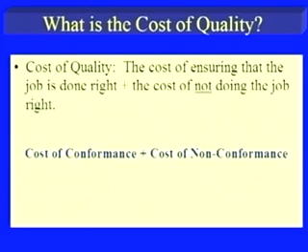If we summarize the above definition, the first part of cost of quality is the cost of conformance, and the second part is the cost of non-conformance. The components are like this: cost of conformance includes prevention and appraisal cost. Cost of non-conformance includes internal as well as external defect cost.

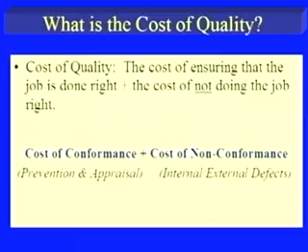The definitions of all four components of the cost of quality are here. The first is the prevention cost, the cost of planning and executing a project so it is error free or within an acceptable error range. The second component is appraisal cost, that is the cost of evaluating processes and their output to ensure quality.

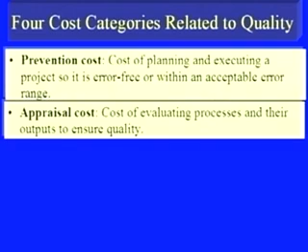The third portion of the cost of quality is internal failure cost, cost incurred to correct an identified defect before the customer receives the product. The important factor in this definition is that we need to be very careful in deciding the cost related to internal failure, the cost incurred to correct an identified defect.

Identified defect means that we are doing some inspection and finding the defect. Not only should we find the defect, but we need to correct it, and these internal costs are the costs counted before the customer receives the product.

The external failure cost is the cost when the product has been shipped to the customer. When the customer starts using it and finds some problem in the product, whatever cost is spent comes in the category of external failure cost. That is the cost relating to all errors not detected and corrected before delivery to the customer.

This cost has a multiple effect: not only is the product coming back to the organization for rework, but it is spoiling the image or the goodwill of the company. So the internal and external failure costs need to be carefully ascertained apart from the prevention and appraisal costs.

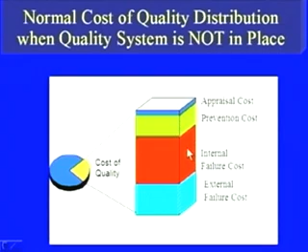Once internal and external failure costs have been reduced, this addresses the three issues I mentioned at the beginning of the lecture: productivity, cost and quality. Once your scrap, rework, etc. is reduced, certainly your productivity is improved, and these costs are reducing because of the better quality.

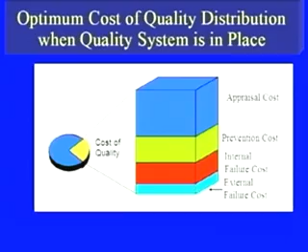So, once better quality is there and productivity is there, certainly the profit the company will earn is much higher than the company which does not have the quality system in place. With the background of understanding of cost, quality and productivity, let us talk about the evolution of quality.

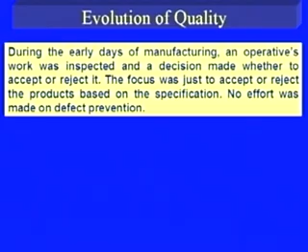During the early days of manufacturing, an operative's work was inspected and a decision made whether to accept or reject it. The focus was just to accept or reject the products based on the specification. No effort was made on defect prevention. That means the total output was based upon inspection.

Inspection basically is an audit tool. It is not building quality into the product, it is just auditing good or bad. So, when the product was produced, the inspector used to inspect it and say it is good or bad. Bad products were sent back to manufacturing for rework or scrap, and the good product was delivered to the customer.

And there was no effort in finding the causes that were creating the bad products. That is why it is mentioned that there was no effort on defect prevention. In 1922, statistical theories began to be applied effectively to quality control, and Shewhart in 1924 made the first attempt at modern control charts. However, there was little use of these techniques in manufacturing companies until the late 1940s.

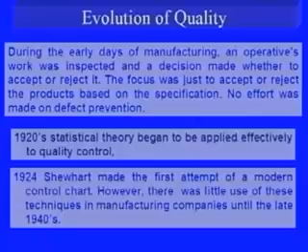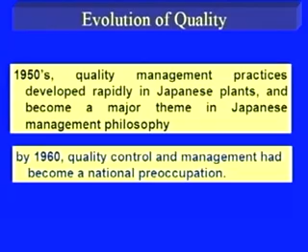In the 1950s, quality management practices developed rapidly in Japanese plants and became a major theme in Japanese management philosophy. By 1960, quality control and management had become a national preoccupation. In 1969, Feigenbaum used the term total quality for the first time, and in 1970, Ishikawa used the term company-wide quality control.

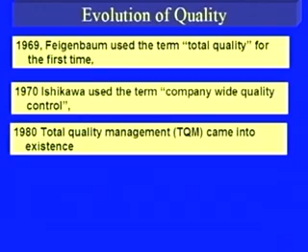In 1980, total quality management came into existence, and as we move into the 21st century, TQM has developed in many countries into a holistic framework aimed at helping organizations achieve excellent performance, particularly in customer and business results.

If we see this evolution of quality in historical perspective, this table has been divided into 4 parts. First, as I mentioned, in the early days of manufacturing the focus was on inspection. No effort was put in to maintain the quality of the product regarding the prevention of defects. The second row is statistical quality control, third is quality assurance, and fourth is strategic quality management. Each is seen with a different primary concern, view of quality, emphasis, and methods used.

If we see inspection, during the early stage of manufacturing, the primary concern was detection of scrap, defective products or defects, although there was no effort on prevention, as I mentioned earlier. The view of quality during that period was a problem to be solved, and the emphasis was product uniformity, that every product going into the hands of the customer should be uniform in all aspects, meaning it should be perfect.

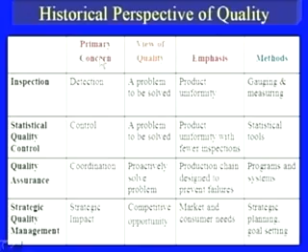Dimensions of quality. Whatever we are saying about the dimensions of quality, let us see what we think of quality. There are various ways we can think of quality. Garvin has given 8 dimensions of quality, since different people see quality in different ways. Garvin has mentioned performance as one of the quality characteristics that a person can see; depending upon the customer, he may be thinking about aesthetics, different points are there. Some people think about the specification, some people only focus on whether the product performs well.

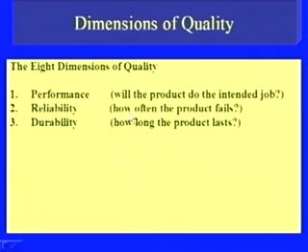So, the first dimension that Garvin has given is performance, and the question we can ask is: will the product that we are getting, or manufacturing, do the intended or required job? The second dimension is reliability. Not only do we talk about the performance of the product, but also its reliability, how often the product fails. Sometimes, in conjunction with performance and reliability, we consider durability, how long the product lasts, meaning the life of the product. Serviceability: how easy is it to repair the product in case there are small failures. Aesthetics: what does the product look like?

Features: what does the product do? Sometimes it's not only the performance, reliability, durability; there are different similar products available in the market. Some products have few features, some products have some additional features. Whatever additional we are getting, that basically appeals to us.

Conformance to the standards: whether the product meets the specification. Sometimes the customer provides that the product should have that much tolerance or that much specification, this much strength, etc. So, whether the product that the customer ordered or thought of initially meets the specification as he has specified.

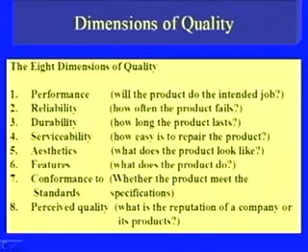And the 8th dimension is the perceived quality. Perceived quality means what is the reputation of a company or its product, that is a goodwill. Sometimes we have in our mind that whatever product we are buying has good quality, or the company's image basically goes with the product.

So, these are the 8 dimensions, and it depends upon the customer, upon the person, whether he is looking for 1 dimension, 2 dimensions or all the 8 dimensions of the product, that he is equally satisfied with the performance, reliability, durability, serviceability, etc.

Maybe sometimes some person goes for only 1 or 2 dimensions, performance and perceived quality. He is only looking that the company should have good quality as well as the product should perform well. So, the person may not bother about how long the product lasts. So, depending upon the requirement, a person can have different dimensions of quality.

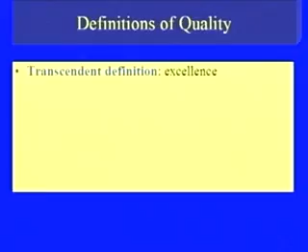And coming to the definition of quality, we can define quality in 5 different ways. The first way is the transcendent definition: excellence in all the aspects. The 8 dimensions I mentioned, when we go for the transcendent definition, we say excellence.

The second definition may be the product based definition: quantities of the product attributes. The product may have 1, 2, 3 attributes, depending upon the customer requirement. The third type of definition is the user based definition: fitness for use, fitness for the requirement, whether the product is fit for my intended use.

Fourth is the value based definition. Sometimes when we go for a product, not only do we check the quality, but also the prices, and we try to make the trade off between quality and price. Sometimes we have good features, good quality, good performance, but costs are high. If the price is the prime concern, we have to think of another product. So, some people go for the value based definition.

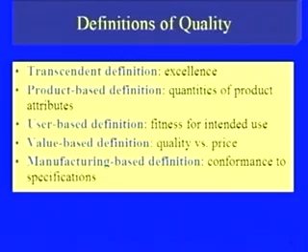And the fifth is the manufacturing based definition that people used earlier: conformance to the specification, whether the product being manufactured meets the specification provided by the designer. So, these are the 5 different ways we can define quality, because there is no unique definition. As I mentioned earlier, it is the individual perspective how he looks at quality.

This is a traditional definition: quality means fitness for use. This is given by Joseph Juran. Customer driven quality, as per the American Society for Quality Control, ASQC: the totality of features and characteristics of a product or service that bear on its ability to satisfy stated or implied needs of the customer.

This means meeting or exceeding customer expectation. Different companies just focus on meeting the customer expectation, and the customer is satisfied. But when you give some additional feature, something extra that the customer was not expecting, that means wow quality. So, there is a difference between meeting and exceeding customer expectation.

So, when the customer buys a product and is satisfied with it, he is a satisfied customer. But once you give the product with additional features that the customer was not expecting, that basically means customer delight. The customer feels delighted in buying and using the product.

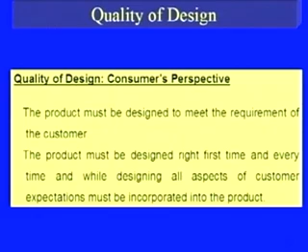Quality of design is basically the consumer's perspective. The product must be designed to meet the requirement of the customer. The product must be designed right first time and every time, and while designing, all aspects of customer expectation must be incorporated into the product. This definition basically changes the focus. Earlier people were only concerned about manufacturing.

Now people think that instead of looking at the downstream, that is manufacturing and the subsequent stages, we should look upstream. When we look upstream, the focus should be on the design. The marketing people, when they go for the survey, contact the customer and try to capture what the customer wants, the voice of the customer. There are various means: surveys, warranty records, individual meetings with the customer.

When they meet, the customer tells them what they want. These marketing people understand what the customer actually requires, then they give the entire detail to the product design section or to the designer. When the product design persons design the product, it is their responsibility. If, as a designer, I think that I am expert in all the areas, I cannot manufacture the right product.

Suppose I try to design a product and since the customer is asking for very high strength, I suggest a certain material that has very high toughness and high strength. Then when my design goes to manufacturing, people may say that we do not have any machine to machine that particular material. Or the purchasing department may say that the material is not available.

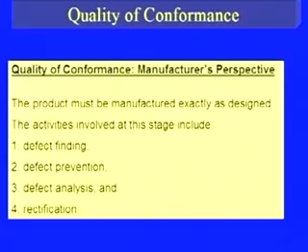So the manufacturer's focus should be that whatever specifications were provided in the design stage, the manufacturing people should provide exactly the same way. If, for any reason, the tolerances or specifications are not met, the first step in the analysis should be defect finding, carefully finding why this is happening. Once you know the different types of defects, then comes control: how to prevent these defects.

So we need to find out the reasons first, then find out where the control mechanism is, and try to prevent all these defects, and this is not possible unless we go for defect analysis. Once we find the defect and analyze it, only then can we prevent it. And our purpose is not only to prevent the defect but to rectify the processes, so that the process performs all the steps necessary to produce the product right the first time and every time.

Continuing with quality of conformance, sometimes the difficulties encountered at the manufacturing stage must be conveyed to the designer. As I mentioned earlier, the designer may recommend a tolerance of plus minus 0.003, up to the 3rd place after the decimal, and the manufacturing section does not have capable machines to deliver such tolerances. So there is communication between the manufacturer and the designer. It is not one-way but two-way communication between the quality of conformance section and the quality of design section, or manufacturing and design.

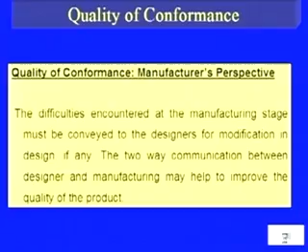As mentioned here, two-way communication between the designer and manufacturing may help to improve the quality of the product. If we look back at the diagram of the three aspects of quality, this is the quality of design section, or the designer section, and this is the manufacturing section, with two-way communication between them. The third aspect we are now going to discuss is the quality of performance. The product must function as per the expectations of the customer.

This is basically the definition part of the quality I already mentioned. Here the communication between the designer and the customer is the key to have a quality product. If I again show that diagram, you see here that there is only one way: once the product has been designed, it goes to the manufacturing people for the conformance. Here the communication lies at both ends, designer to the manufacturer and manufacturer to the designer.

Then whatever product has been produced goes into the hands of the customer, and the performance quality of the product is measured here. But if something is wrong, maybe the product is not performing well, then instead of going back through this section, through the marketing persons, there is a two-way communication between the designer and the customer. So designer and customer basically deliver what the customer wants and what they can provide. This two-way communication is of prime importance at this stage.

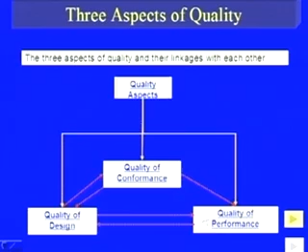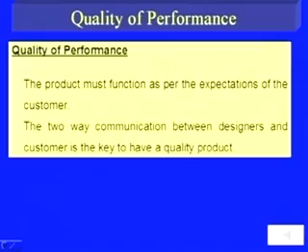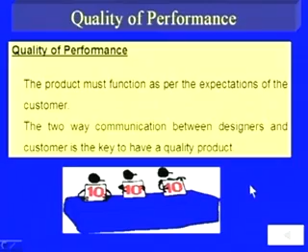So, once we have all these three aspects, quality of design, quality of conformance and quality of performance, in all the cases we need 100% perfection: our design should be 100% right, our conformance to the specification should be 100% right, and the quality of performance should be 100% right. That is, we should get 10 out of 10 in all the three aspects of quality. Only then do we say that yes, our product meets the expectation of the customer.

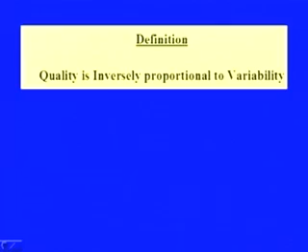The other definition of quality: we have talked about two definitions earlier, that quality is fitness for use, and quality is what the customer wants or exceeding the customer requirement. This is another definition, the modern definition of quality, that quality is inversely proportional to variability. Variability means variation: the higher the variation, the poorer the quality. This variation will be either from the processes or from the product. As far as the processes are concerned, we need to control the processes.

Every process, every machine, every person has inherent variation. This inherent variation is basically the evil that is creating the problem. ISO 9000 is the answer to it. The answer that ISO 9000 provides is a totally documented approach, and its focus is that whatever you do, you document it, whatever you have documented, you do it, and you follow it consistently.

Now, the question arises whether what we are documenting is right or wrong. If we have documented the wrong procedures, we are following the wrong procedures consistently. So that should not be the approach. Before documenting, we need to standardize the processes and the methods, and we should document only the right methods and right procedures. Once the procedures have been standardized, the total documentation should be there, and whatever is documented, we need to practice it.